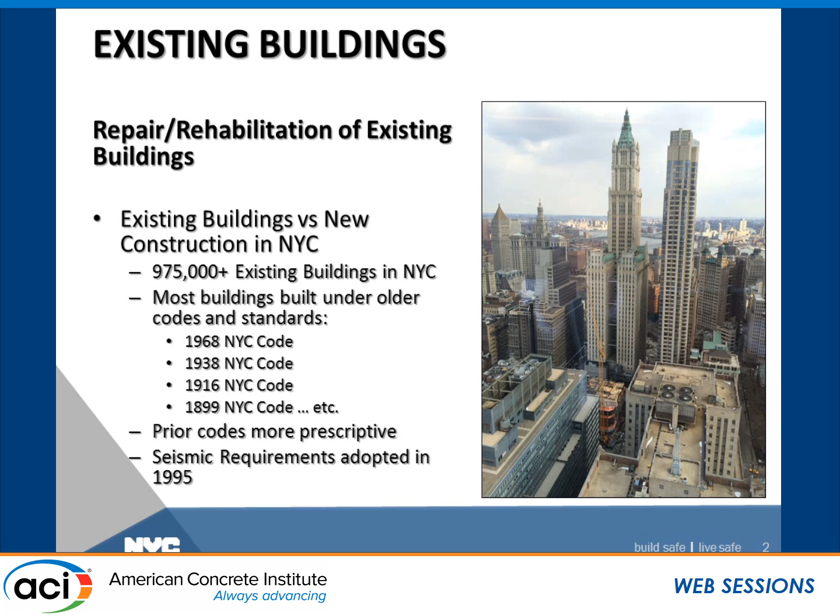And just for instance, in New York City, we didn't have seismic requirements until 1995. The vast majority of our city was built prior to seismic requirements being in effect. So while seismic requirements in the model codes may be going down, that may be a completely new consideration for an existing building in the city.

Also, how much work is going on in these buildings. It's not necessarily the safe, unsafe trigger of a building that has suffered some form of damage, but what exactly are people doing with these structures? And I'm glad somebody mentioned adaptive reuse before, because we see a lot of that. Just to give you a comparison of the work permits that are issued: over 148,000 work permits were issued in 2012 by the New York City Department of Buildings. 1,462 were for new construction. All the rest were for work on existing buildings.

Now, that includes more than just structural work, obviously, but people are doing work on these buildings on a regular basis. They're reusing them for new purposes or doing work on them either to maintain them or to upgrade them for some specific purpose. And so much so that we had to come up with yet another term. I know our committee loves our terms. We've debated greatly: existing building code, general building code. We developed a term in New York City specific to our earlier codes called prior code buildings, just to put them into a bucket so that we could start to deal with the specific issues of buildings designed under codes that just don't fit the current IBC requirements.

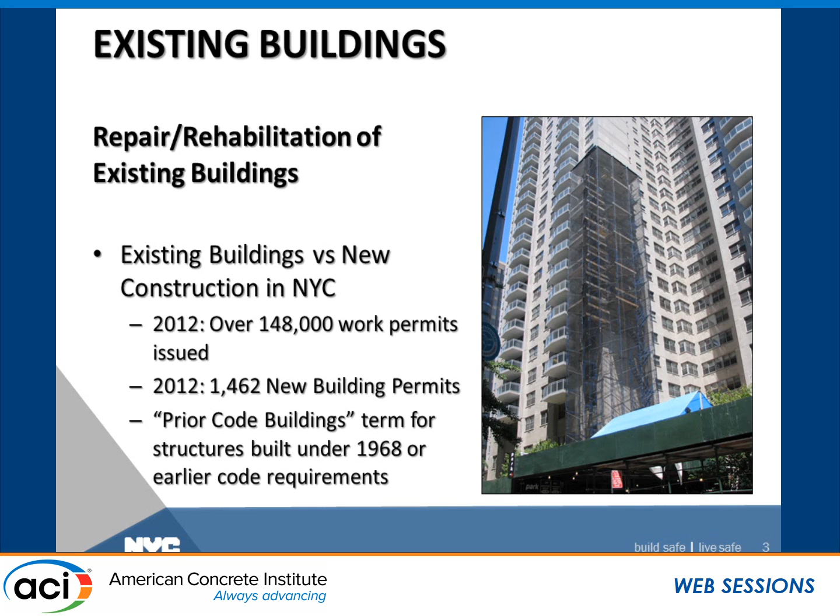So many of the repair and rehabilitation requirements are in guides, not necessarily mandatory standards, and they're not necessarily adopted. Current building codes address new construction. The model codes themselves, other than the IEBC, address new construction, and many of the mandatory standards are for new construction. And many of the ACI standards for repair and rehabilitation, for example, are guides.

They're guidelines. So engineers on a regular basis ask the Department of Buildings if they can ignore specific provisions of a code that don't fit their needs, and those are the mandatory standards. Now imagine you give them an optional standard to follow. So these things are sometimes very loosely interpreted by people.

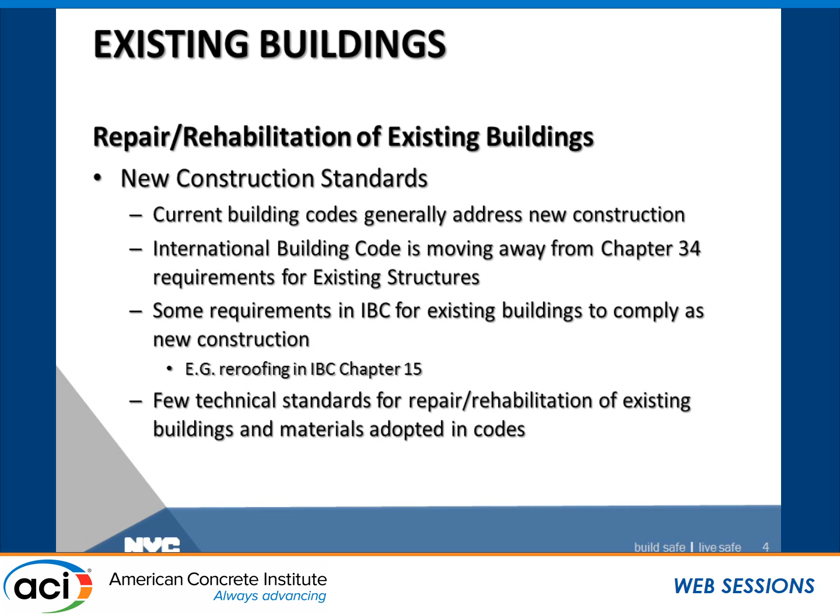As was mentioned before, the IBC is moving away from Chapter 34 and heading towards the IEBC. Now there's still some random requirements in the IBC for upgrading of your structure when doing specific work. Don't ask me how re-roofing managed to find its way into the new construction standards of Chapter 15, but there it is. And the few mandatory standards that are out there really aren't adopted in any of the building codes or the IEBC itself. But the IEBC is becoming the model building code for work on existing buildings.

We debated greatly the use of a hyphen for an existing-building code, but just stick with me. It's an existing building code. The IEBC is becoming the model code for that use, and you'll see here, this is a chart from the ICC website. It's been adopted either locally or statewide in many states in the U.S. I think it's something like 39 states.

Now that doesn't mean all these other jurisdictions don't have requirements for work in existing buildings. They do. It's more of a local requirement. And just because you see the IEBC has been adopted, it doesn't mean that they didn't modify it on the local level. So the requirements still do vary, but at least there's a national standard out there that's trying to get everyone to one space so that we all know what we're doing when working in an existing building and what we need to do.

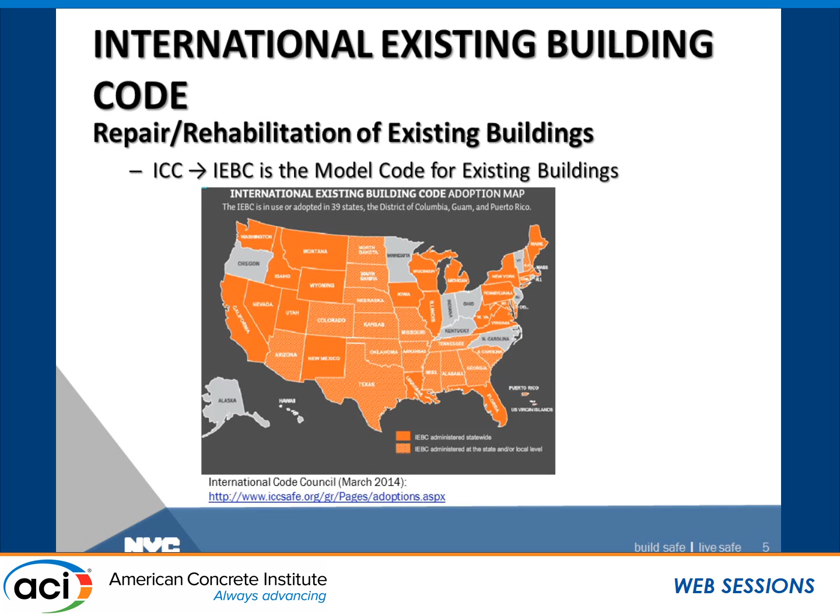Some brief highlights of some of the provisions in the IEBC and what you need to do. It does cover repair, which is a slightly different term than the ACI term. Repair in the IEBC means restoring to the prior condition, whereas repair in ACI terminology can mean upgrading the capacity. The repairs there are intended as something just being restored to its current capacity. Anything above a repair is what they consider an alteration.

The IEBC does address changes in occupancy as well as other things such as additions, moving of buildings, as well as separate provisions for historic structures where maybe upgrading to current standards isn't as feasible as with other types of buildings. Now, there's multiple methods of compliance.

The prescriptive compliance method basically tells you which code to apply depending on what type of work you're doing, and it's very short. If you're doing new work, comply as new. If you're not touching it, leave it alone, is a general way to sum it up. But depending on what you're doing, you may need to upgrade, or you may be allowed to leave things alone.

The work area method, depending on what percentage of the floor area you're touching in the building, will trigger specific requirements. And a performance method, where you can demonstrate equally safe compliance with what's in the IEBC. And of course, just like 562, the IEBC refers you to ASCE 41 or 31 for evaluation of existing buildings for seismic design revisions.

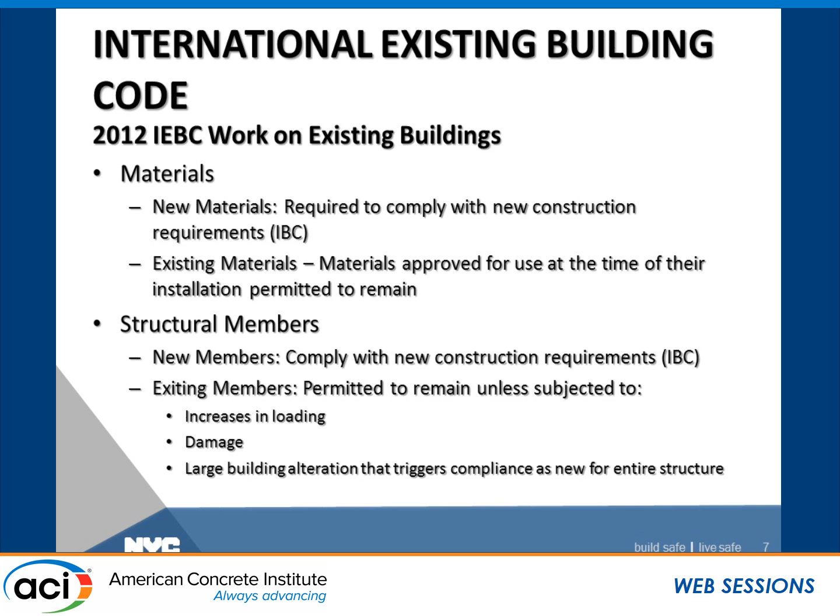But again, the IEBC is the model code, but it doesn't have any technical reference standards from the design standpoint. It'll tell you that you need to design a repair. It tells you that you need to upgrade your building, but it leaves it up to the design professional to come up with a proposal, and it leaves it up to the building official to judge whether or not you've met those requirements as far as designing the repair.

The non-seismic evaluation of a structure is required in the IEBC, but it doesn't give you a reference standard like ASCE 41 for how to perform this evaluation of the structure, or the individual members of the structure, to see how they're performing and how they size up. And there are no quality assurance requirements specific to repair and rehabilitation, even though they may be required. For instance, one that I'm going to show you a little bit later would be FRP.

The use of FRP in many jurisdictions is permitted based on the use of an ICC evaluation service report. Those ICC evaluation service reports all list required special inspections when using them. Not many people know that. I'm not sure how it is enforced across the country, whether it's uniformly enforced or not, but that's something that we find in New York City, that when people apply to us, we seem to be the ones informing them that this inspection is required rather than it being common knowledge.

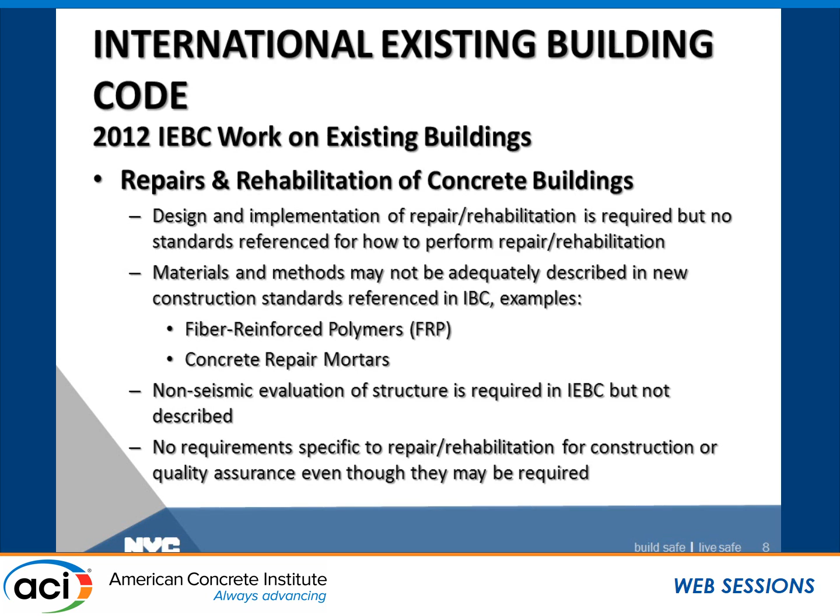Now, how does ACI 562-13 fit in? Well, where a jurisdiction has provisions for work on existing buildings, an existing building code of some sort, ACI 562 can be used as a reference standard for the evaluation and for the design of the repairs or rehabilitation of the structures to comply with the existing building code requirements, whatever they may be, whether it's upgrade the structure to new code requirements, to new occupancy requirements, or to restore it back to its original condition.

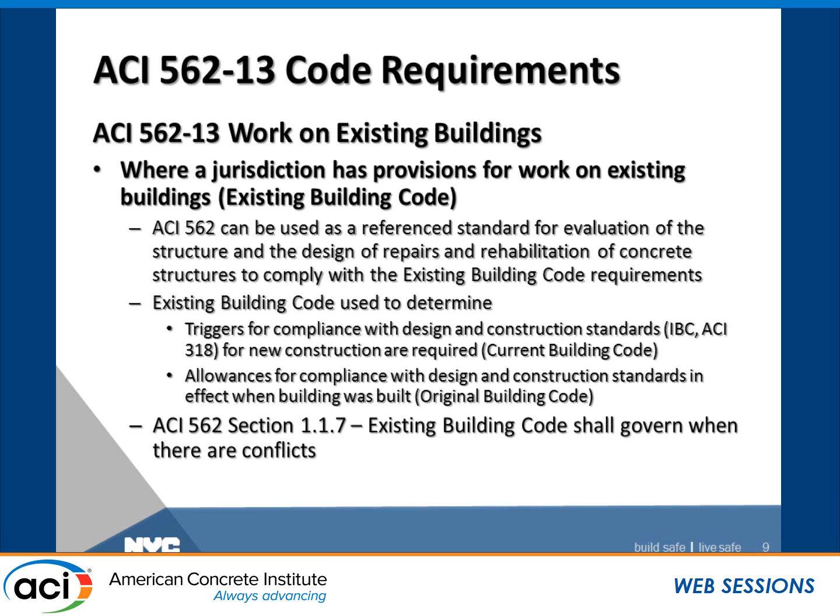The existing building code itself will give you the triggers for compliance, when you need to comply with new standards and when you're permitted to comply with the previous standards themselves. And of course, 562 has a nice little catch-all provision that says whenever there are conflicts between 562 and the existing building code, the law in your jurisdiction governs.

Okay. Now again, this is, as Gene pointed out and went through, a very detailed assessment of what to do when your jurisdiction does not have any provisions for existing buildings, which is quite possible. We do have them in New York City. They're, again, similar to the IEBC. We tell you when you need to comply as new, but we don't tell you how to retrofit a building. But when a jurisdiction doesn't have any provisions for how to comply, there's 562 Section 1.3, and this is the 2013 edition. I kept my talk to the requirements that have been finalized and are published.

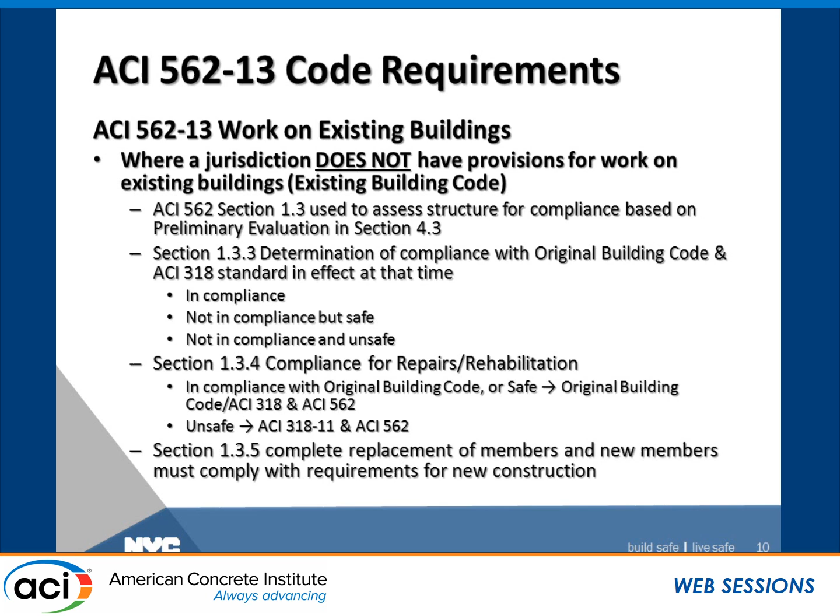562-13 Section 1.3 talks about how to determine compliance, how to perform an evaluation, and how to determine when to comply with new construction standards, when you're permitted to go back to the original building code requirements, and so on. And of course, Section 1.3.5 of 562 says new elements being installed in the building have to comply as new. So if you are installing completely new elements, they do have to comply as new.

Chapter 5, loads. This is a big hole, I feel, that this fills in some of the current code language that's out there, and Chapter 5 addresses that you have to address loads during all phases of the construction and repair process, and also the shoring process. I don't know if IEBC at all mentions the fact that there will be temporary conditions during the repair that will have different loading conditions, and that those need to be considered.

I know I may be preaching to the choir here with many of you as you've traveled here to participate in code development and things of that nature, but there are many engineers out there who, sometimes when you ask them to evaluate the intermediate conditions, it's news to them. So this is a very good thing to point out to everyone.

References to ASCE 37 for unoccupied buildings and ASCE 7 for occupied buildings as far as temporary loading conditions and loading requirements. So that's a very good reference that you're not going to find in the IEBC, and this really does supplement the IEBC or other existing building provisions quite well.

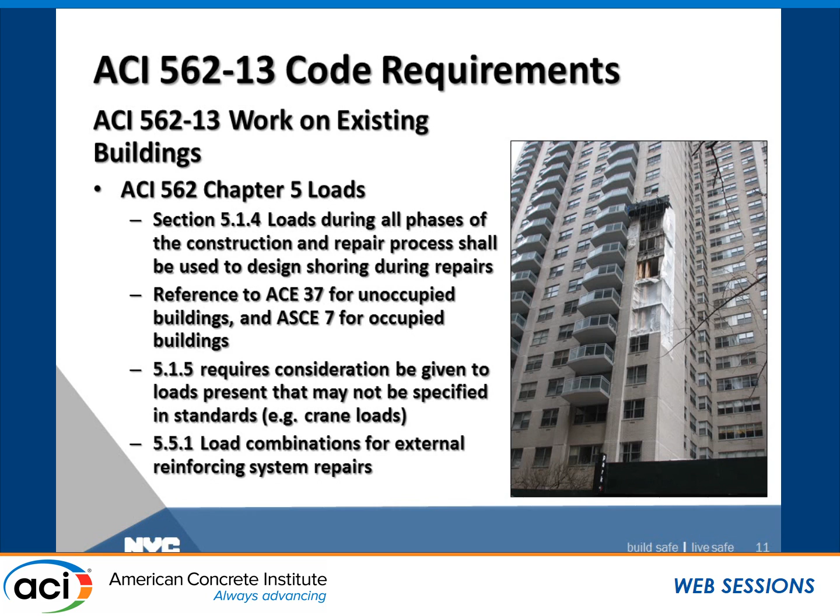And the evaluation of the structure itself is also described here quite well, I think. It comprises two separate components: an actual assessment of the structure itself and an analysis of the structure, and it can be comprised of one or both of those methods. Again, this is a very performance-based document, so it is going to vary from site to site.

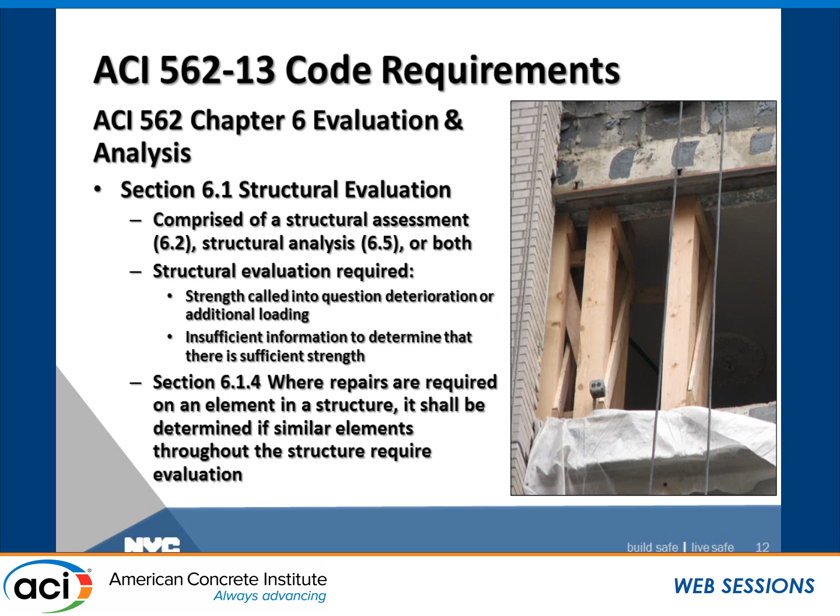Now, an evaluation will be required per 562 when the strength is called into question due to deterioration or some kind of additional loading, or maybe there's insufficient material and insufficient information available to make a good determination as to what the strength of the structure is. And Section 6.1.4, where repairs are required on an element in a structure, it shall be determined if similar elements throughout the structure require evaluation. So that's something that's not necessarily covered anywhere else, and 562 does a very good job of addressing a serious issue as far as a building official is concerned.

Section 6.7 talks about the structural analysis for the repair design. And it has to consider the actual repair process, including the material removal phases of what's going on during the repair that's being proposed. And Section 6.8 does also refer to load testing as being an acceptable alternative.

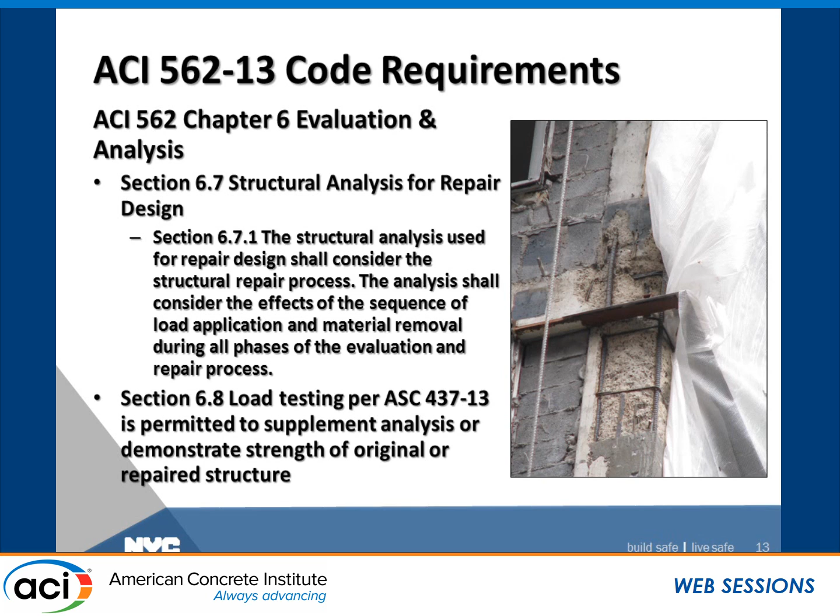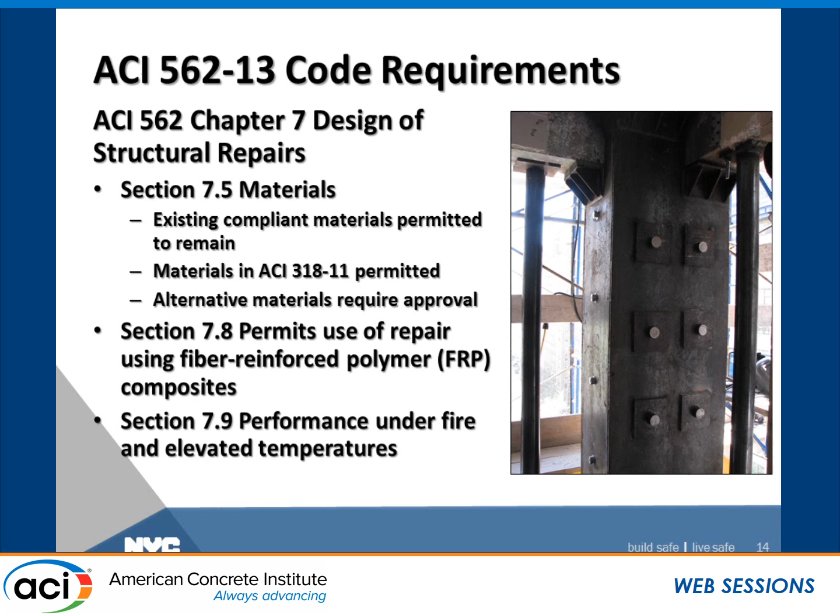Okay. Chapter 7 discusses the repair materials. Again, similar to what's in the IEBC, and again, I'm generalizing in a lot of cases here, but existing compliant materials are permitted to remain. New materials have to comply. New materials compliant with ACI 318-11 are permitted, and alternative materials require approval, but it does address FRP and other external reinforcement, as well as giving performance under fire and elevated temperature requirements. These are very good additions to what's currently out there in the standard language as opposed to the guide language.

We do it through a buildings bulletin where we publish requirements and review them. We typically get input from stakeholders. We publish our requirements on our website in these memos called buildings bulletins. They are typically not manufacturer specific. Anyone who can meet these requirements can go ahead and use their product as of right, provided that they meet the requirements specified in the bulletin.

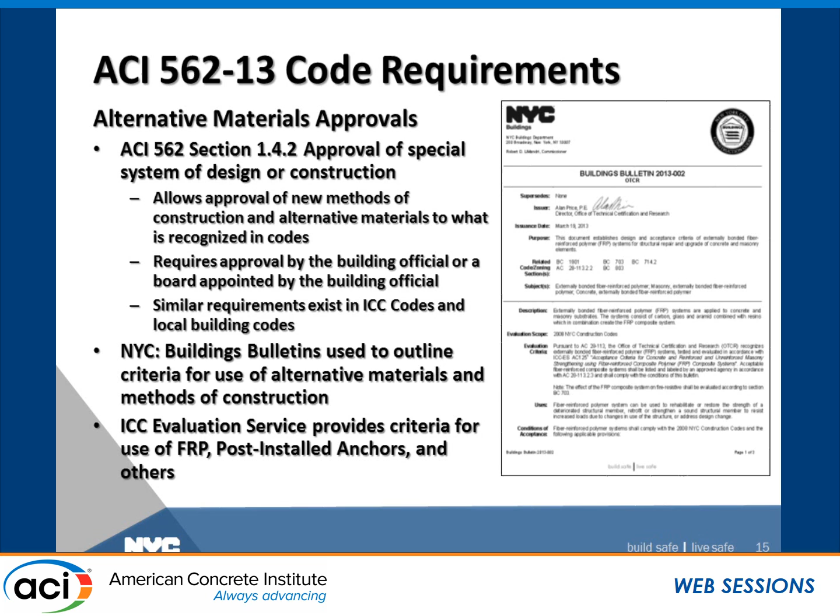And ACI 562 1.4.2 also covers the approval of alternative materials. Many materials that are proposed for repair are going to be alternative materials and will need approval from the local building official to go ahead and use them. And the ICC Evaluation Service does have requirements for FRP, post-installed anchors, and other types of materials that are available for building officials to use. They're not automatically accepted, but they are more guidance material available out there.

A little on construction. This is a part that most building officials do have some serious concerns about. One of the things that you worry about is the phone going off in the middle of the night and worrying that it's some kind of an incident or an accident at either a construction site or an occupied building. Many times, unfortunately, it is related to construction operations, either from an adjacent structure or from the work being done inside of a building itself. And 562 does go a long way in addressing some of the concerns associated with this.

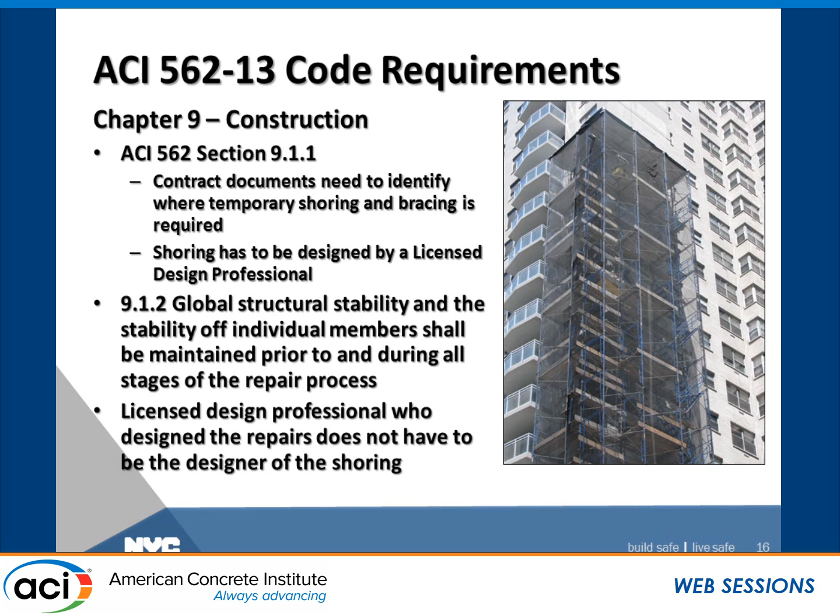So contract documents need to identify when temporary shoring is necessary during the repair process, and even during the evaluation process or post-evaluation if temporary shoring is needed. Now, shoring does have to be designed, but it doesn't necessarily have to be designed by the same professional who prepared the repair design documents. That's been a concern that's been voiced, but 562 does permit another professional to do this design.

Okay. A little on quality assurance. Again, section 10.1.1 of 562 says quality assurance is required when required by the local jurisdiction. Testing of the repair materials as specified by the licensed design professional and construction document observations are supposed to be specified on the construction documents. Now, it depends on the jurisdiction whether or not you're going to actually have other requirements for quality assurance, special inspections, whatever you may call them. Again, I highlight the evaluation service reports and sometimes the Department of Buildings bulletins. The local requirements may specify specific quality assurance requirements that need to be implemented.

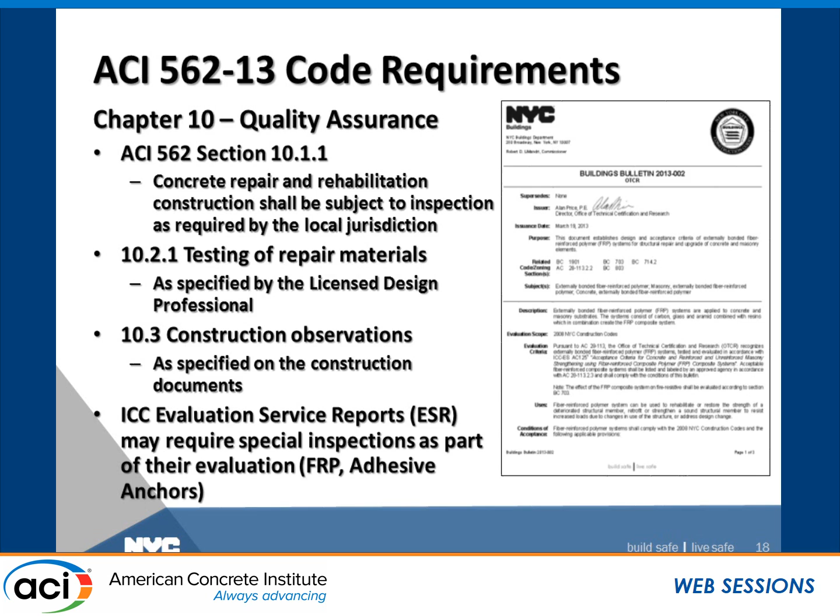Now, the 2012 IEBC in Chapter 1 does say that special inspections shall be required in accordance with the IBC. That's a good start, but Chapter 1 is probably the chapter that's most modified when a jurisdiction adopts it. We definitely modify every Chapter 1 of the ICC documents in New York that we adopt. And I checked quickly, for example, Seattle. They've adopted the IEBC, and they have struck this section from Chapter 1. So what specific special inspection requirements will apply? Well, you've got to check with the local jurisdiction.

In addition, let's say you even do have this requirement. Well, it's going to send you to Chapter 17 for new construction with lots of references to 318. Depending on which version of IBC is adopted in your jurisdiction, that may have different requirements, and it may not include anything with regards to post-installed anchors. It definitely doesn't include anything on FRP. It doesn't include anything about bond, surface prep, you name it, maybe some visual observation periodically of application techniques of the concrete material. So you're really going to have to work with the local building official to determine the level of quality assurance that's going to be provided.

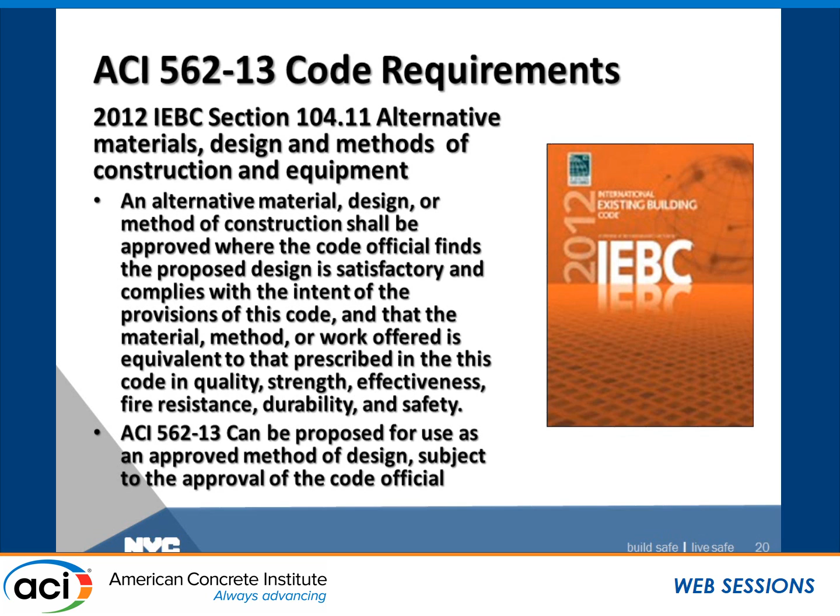Gus, you mentioned that New York City is going to have or does have an existing building code. Can you just expand on that? Because I wasn't sure that was the case. Well, right now we have provisions for how to address existing buildings in the administrative code, and it basically allows, depending on what you're doing, to go back to, let's say right now we're on our 2008 code. Depending on what you're doing, you can go back to the 1968 code.

The 1968 code also had provisions for how to deal with existing buildings, and I think that was based on cost. So if you were doing work on a building that was less than 30% of the cost of the building, you can go back to the code that the building was originally designed under. So if you go back to some of my larger high-rise examples, if you think of work on the Empire State Building, you have to be doing a lot of work to exceed that 30% cost of the building to trigger that.

I'm glad you brought that up, because right now it's not in a separate code, it's in a separate section, but we will be going forward with an adoption process for the IEBC, and I personally am going to be working on the structural portion, and I'm going to be proposing that 562-13 be included as part of that review process.